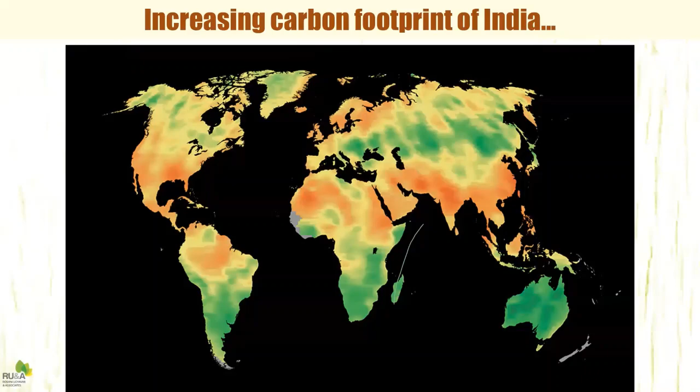Now, I want to show you this particularly from the context of India, which is a developing nation. And although our per capita carbon dioxide is low, our overall carbon dioxide emissions are increasing and our carbon footprint is increasing on the planet. We are third today in the world and increasing by leaps and bounds. So in terms of climate change, which is one of the major changes being caused by us, we need to do a lot in terms of mitigation.

We have the time, we have the resources because we are not yet there, and we can do the changes, we can think of the correct technologies, we can think of the way by which we can reverse many things which many of the developed nations are not in a position to do.

The World Meteorological Organization's latest report on the state of climate change says that the concentrations of carbon dioxide in the atmosphere hit a record level of 407.8 parts per million in 2018 as compared to pre-industrial levels of 280 parts per million. This is a huge jump, and this has led to an increase in temperature all over the world.

Not to mention that more than 26% of the ocean has become acidic, and as a result there are so many changes that are happening to the environment. There is unpredictable weather, there is increase in precipitation, and so on and so forth all over the world.

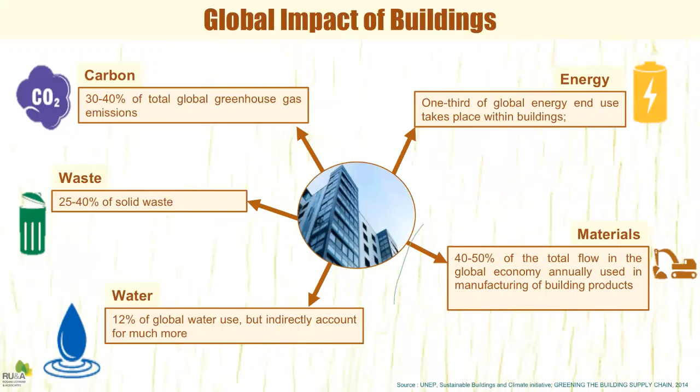12% of water, and that does not include the water that goes into materials. Solid waste, 25 to 40%. So this is the contribution or the impact of buildings. The built environment is next only to agriculture in its impact on the Earth's ecosystems.

If you look at these two graphs, and I just want to show it very quickly, just to give you a background, India's primary energy consumption, you can see the first graph, 56% is still from coal, no matter how much we're talking about renewable energy, etc. So that means that we are still a huge contributor to carbon dioxide by using coal as a basis for our primary energy consumption.

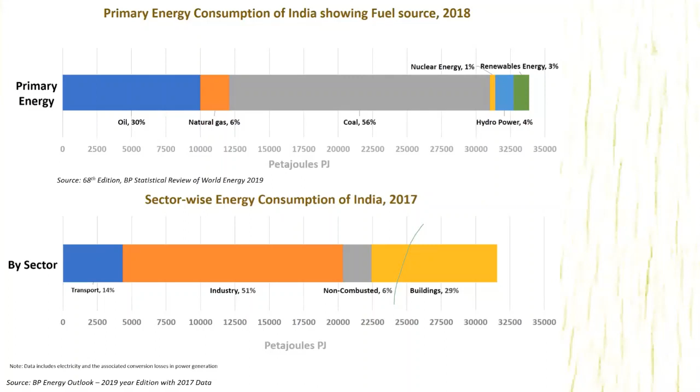And if you look at the second graph, the buildings are one of the major consumers of energy, 30%. So we can do a lot by reducing our energy consumption, plugging our fossil fuel emissions, by making our buildings more energy efficient, by replacing the sources of energy to renewable energy, and so on.

Hello. Yes. Ma'am, you are not there on the Telegram group. Hello, Roshni madam. Hello. Hello. Roshni madam, you are not audible. Roshni madam. Rushali madam, can we call her? Yes, I'll call her. Yeah, I'm here. Okay, okay, ma'am. Sorry for the disruption. I think I will again need to share my screen. Yes, yes. So can you see the screen again?

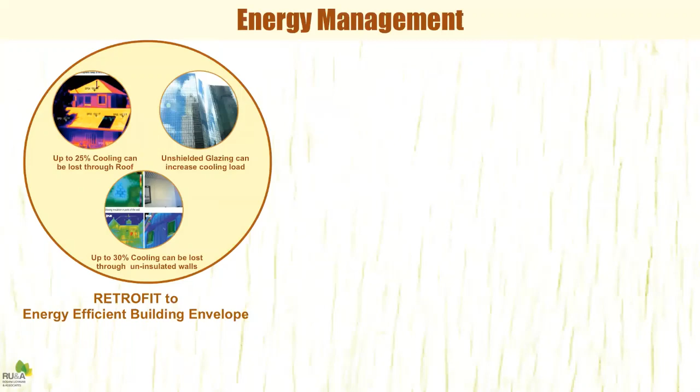And then of course the walls, we don't have proper quality walls, then uninsulated walls. These all lead to making the buildings inefficient. So building envelope includes the roof, the walls, the windows. If these are properly designed, or these can be retrofitted if required, then they can contribute up to 15 to 20% of energy reduction of the building. So that is the first part.

The second part is lighting, HVAC, that is air conditioning, and other equipment. There are many of these lightings. For example, now everybody is shifting to more efficient lighting. But however, in a lot of places we still find old 40-watt tube lights, which are inefficient, the T12s and so on. So these can be replaced with more efficient lighting. You can have sensor based, you can have controls, you can make the most of daylighting, so that you do not require a lot of artificial lights.

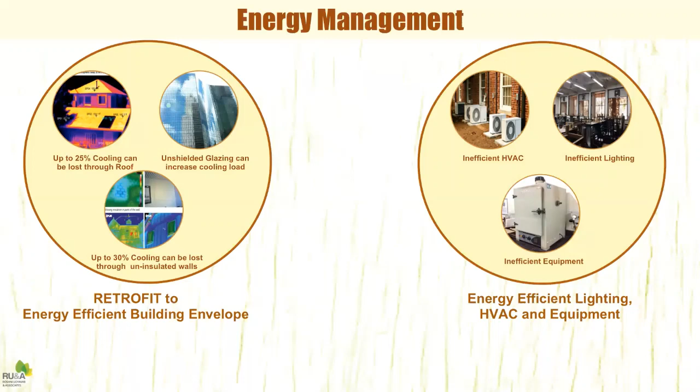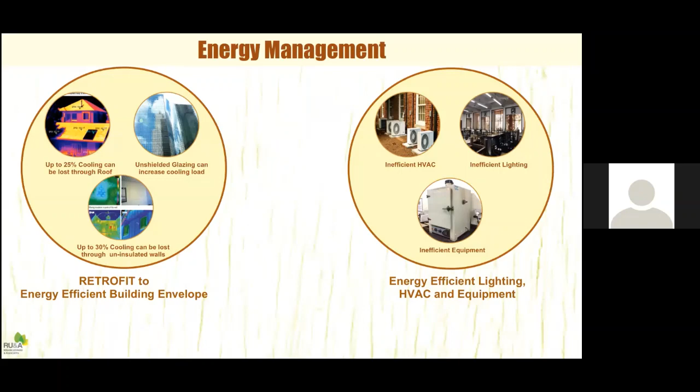You can replace over time the HVAC. Your air conditioning system may not be working as it was supposed to, and therefore you need to check that and improve it, monitor it over a period of time. And also the other equipment that we use in different types of schools and colleges are also causes. So all of this is the second part, where we have the scope of reducing your energy bills, increasing your energy efficiency.

So once we do the envelope and the equipment, the third thing is to see if we can introduce renewable energy. That is solar energy mainly, because that is the easier thing to be done. Other forms of renewable energy will require a little bit more thought, but in some places solar wind hybrid has also worked very well, and that can also be tried, especially in case of large campuses, to have a battery backup, and then you can have this kind of system. So this is in a nutshell what energy management covers.

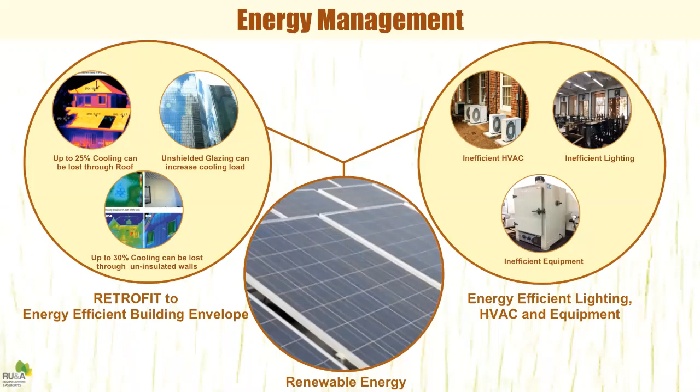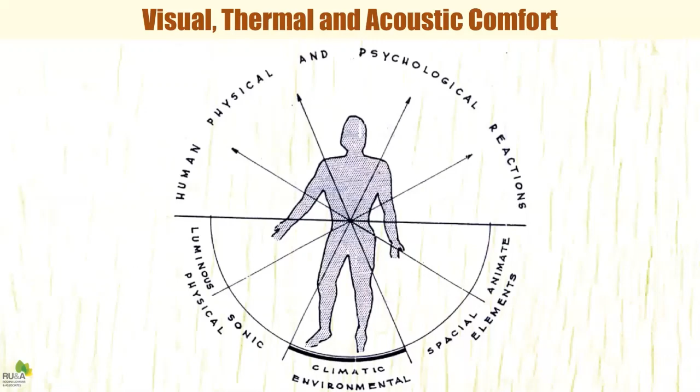But what is important for us as designers is also that, okay, you make the building energy efficient, but is it comfortable for the inhabitants? Do they sweat out when they sit in the classroom and they cannot concentrate on the lecture? Or do they need more light? Do they need to put on the light all the time because there's not enough daylighting? Or is there too much noise coming from outside? So visual, thermal, and acoustic comfort is as important as energy efficiency.

So I want to give you one example of what we had done for a college in Mumbai. We had retrofitted it for achieving both thermal comfort and energy efficiency. And I will just show you what was the case in this. The 6th floor required a retrofit, and we introduced the following items. For example, dry wall. Dry wall is a hollow wall which can be used instead of a solid brick wall. We introduced high albedo paint, which reduces 50% right away of your solar radiation coming onto your roof. We introduced a radiant barrier, which is, no matter how much heat is falling on your roof, it does not radiate it inside the building.

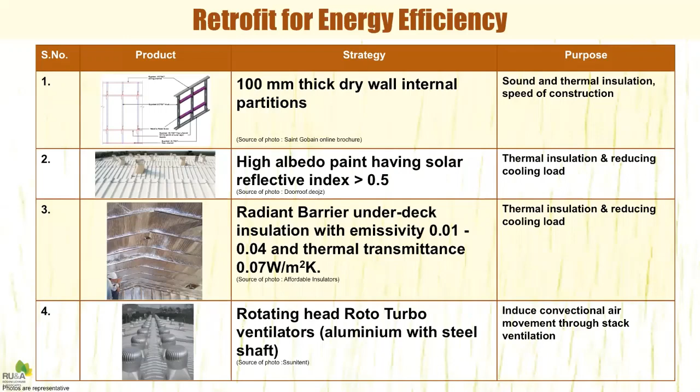We introduced rotating turbo ventilators, which helped the stack ventilation. Unfortunately, the whole building had on the top a false roof, which prevented any movement of air. So we facilitated that air. We opened up the spaces. Then we introduced various kinds of lighting. So, corrugated translucent sheets and polycarbonate sheets so that the light could come in, so that there is no need of artificial light. In terms of spatially rearranging, we removed the false ceiling, we increased the windows so that there is cross ventilation, and we provided stack ventilation by removing the false ceiling.

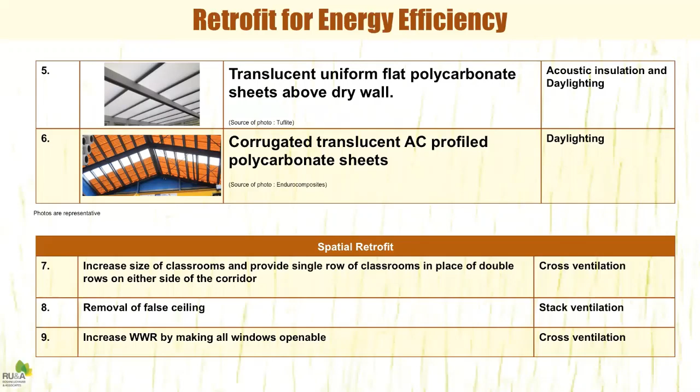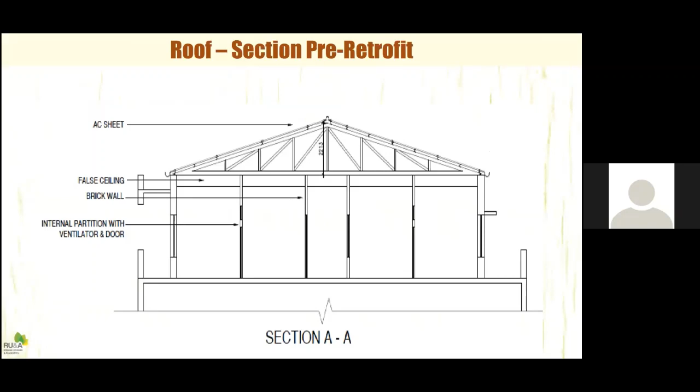So this is how the building looked. Initially, it had a false ceiling, brick wall, and so on, and there were internal partitions, and we changed it to this. So, there is stack ventilation, cross ventilation, there is a reduction of heat from the roof, which was the main cause of discomfort.

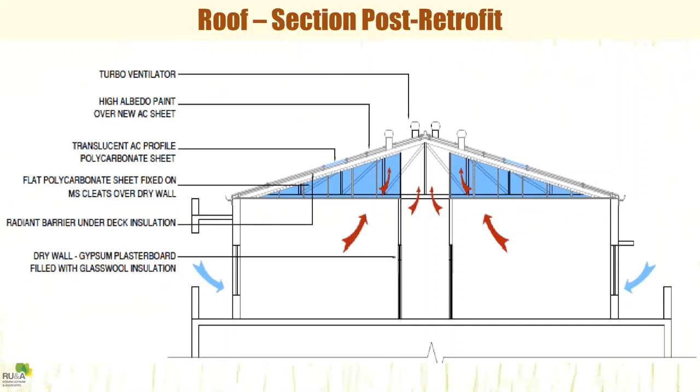And this is a cross section of the roof, which shows you a very important factor I want to point out here, the figure 4.64 watts per meter square Kelvin. That is the U value, or the thermal transmittance of the roof earlier. And what we were able to reduce it to was 0.03. So that meant a significant drop in the heat coming inside the building.

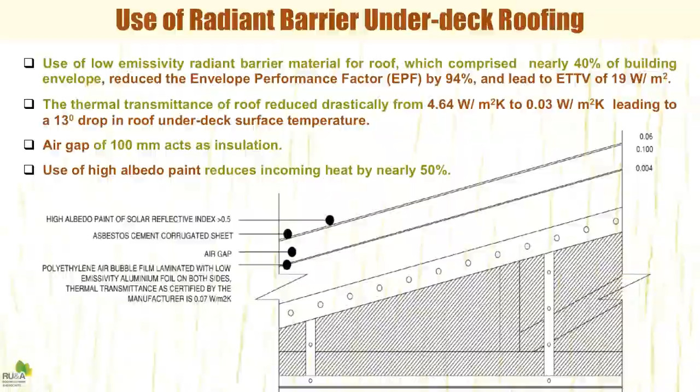So these are some pictures before and after, how we managed to open up the spaces, how we managed to create more light and ventilation. Not rocket science, but simple things that could improve the acoustic and thermal comfort and the visual comfort inside the buildings.

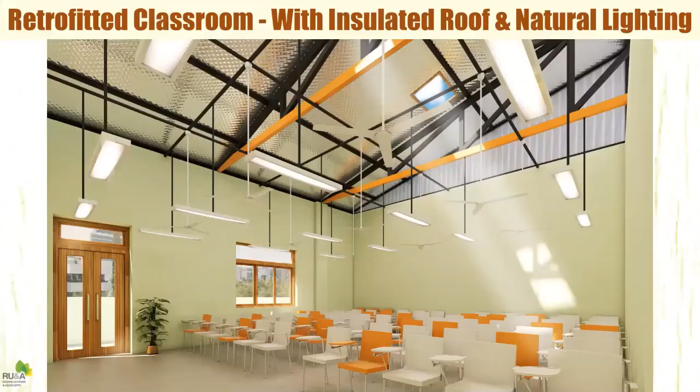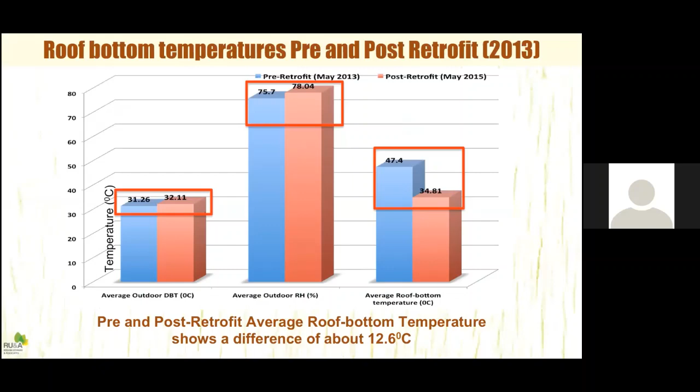So this is a view of the classroom. What we were able to achieve, we measured it. We always monitor our projects. So we measured pre and post retrofit within the same kind of outdoor temperature and humidity. What was the difference? And we found that there was almost 12 to 13 degree difference in the roof bottom temperature, which is significant because that will overall reduce the mean radiant temperature and provide better thermal comfort to the occupants, apart from the other things that we achieved, that is the natural lighting, and so on, which has many benefits.

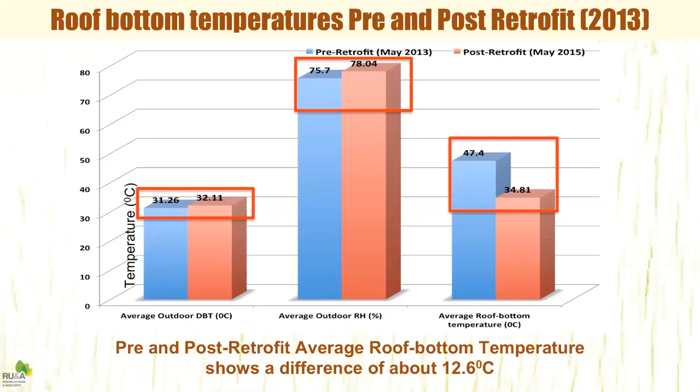The second example of retrofit that I want to show you is that of the Empire State Building, which you must have all heard of. It was a building built during the 1930s depression, and it was a very, very energy guzzling building, as you can imagine, a tall building, and had many, many issues. It was a very iconic building, but it used a lot of energy. So an energy retrofit was achieved here by Rocky Mountain Institute.

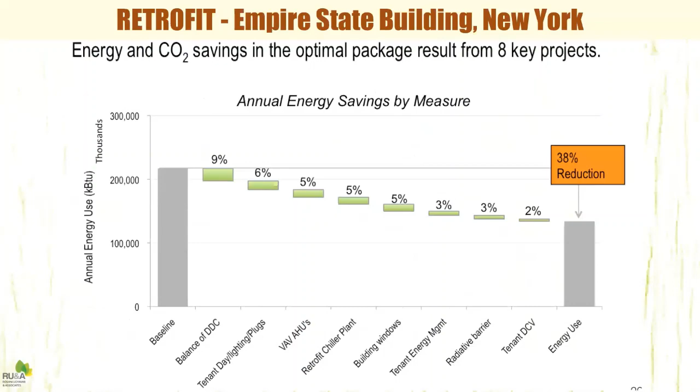And you can see the various things at the bottom that were done, but the important thing, if you can see the building windows, there were 6,500 windows of the building that were replaced. And that led to a decrease. So you can see there is a stepwise sort of reduction. As you make the envelope more and more efficient, the less air conditioning you require, and overall about 38% reduction was achieved in a building of that kind, just by doing a good retrofit. So you can see the building here, the 6,500 windows were changed from single glazed to triple glazed, and that achieved a lot in terms of making the building efficient.

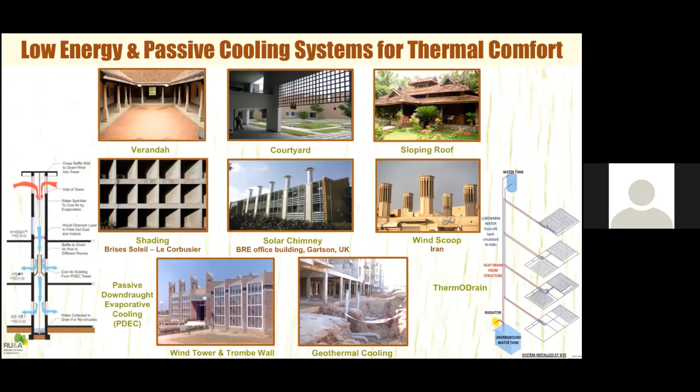I talked about visual and thermal comfort. So I quickly want to show you that thermal comfort has already been there in our traditional architecture. If you see verandas, courtyards, sloping roofs, these are all traditional elements, and these have scientific principles because they have stack ventilation, night sky cooling. All these are principles that we have already used. And if we simply adopt them in our modern buildings, we can achieve the same kind of thermal comfort.

The second row of pictures here shows the shading devices, which were introduced by an architect called Le Corbusier. He used these large shading devices called brise-soleil, or the concept of solar chimney, or the wind scoop that is used in traditional buildings in Iran. And on the bottom, what you can see are the modern transformations of these principles used in modern buildings, the wind tower and the Trombe wall, the geothermal cooling, which helps the building to cool naturally. So all of these technologies try to use zero or next to zero mechanical energy. That means less and less energy. The building by itself is designed in a way that it doesn't consume energy.

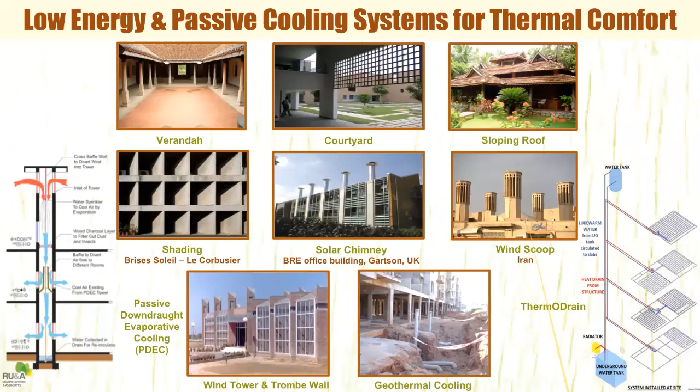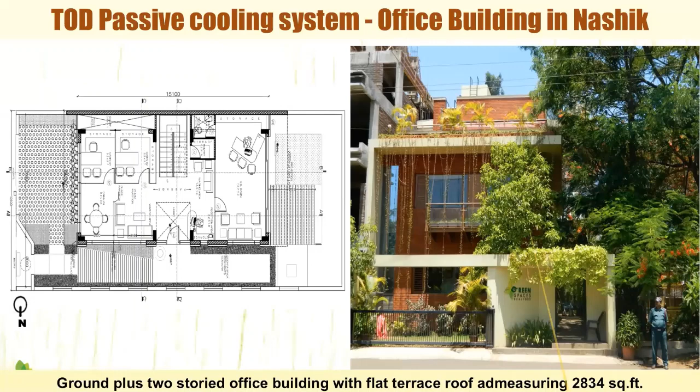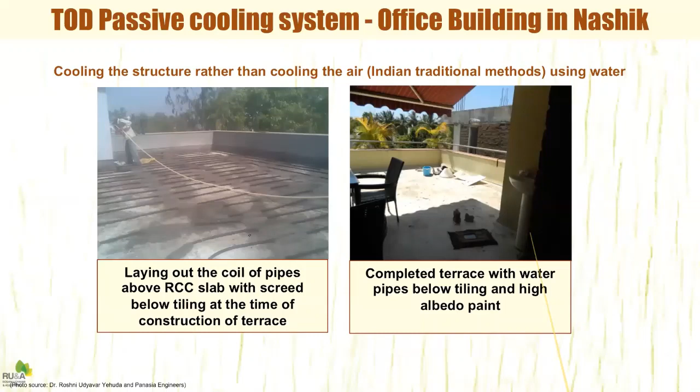And on the right hand side, you will see something called ThermODrain, which has been experimented. This is a commercial building done by architect Sanjay Patil, and Panasia Engineers, Mr. Surendra Shah, has worked on the cooling system. So it is a natural cooling system. There are pipes inserted inside the building in such a way that almost the entire cooling requirement of this building is met through passive means of water circulation in the slab, and there is no air conditioning system in this building, and yet the building remains cool by just this system. These are pictures of when the pipes were being laid out, and post that when we took the measurements, and you can see the results.

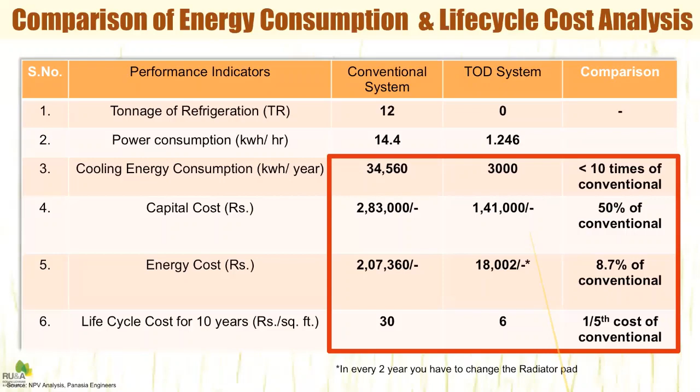So why wouldn't all buildings be designed in this manner, so that you do not require, or you require very minimal air conditioning as a backup only? So we have covered thermal comfort. I've shown you an example, and now I want to focus a little bit on daylighting and visual comfort, because this is also a very important component, not only daylighting, but also artificial lighting.

How we design this, or how sometimes we have windows and we have seen that they are blocked with some things, not consciously done, but in many of the buildings, we find that the very source of light and ventilation have been closed permanently or are not allowed. So our job in this retrofit is just to look at these things and increase these, because natural light not only has a positive effect in terms of the use of less artificial light, but also it has a positive effect on your psychology, and you're able to work more productively in a place which gets good natural light.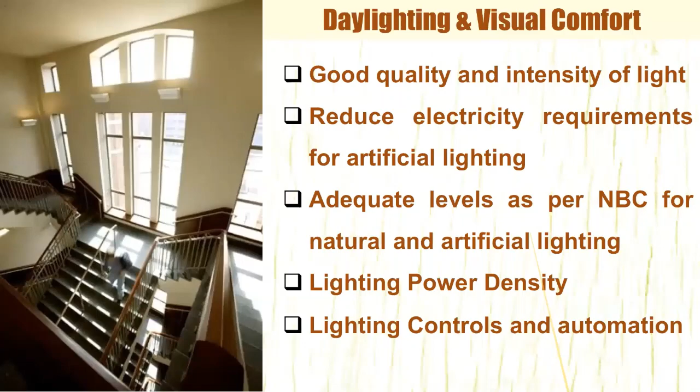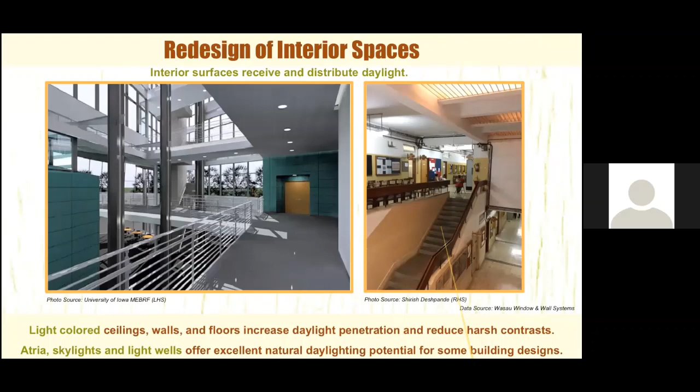So lighting power density, for example, how much artificial light you're using per square meter of space, all these are important. And if you can introduce lighting controls such as photo sensors and so on, those are also part of things that can be done. Here I just want to show you light wells, for example, light which not only comes from the walls but also from skylights, how you can introduce them. And they have been introduced in some of the buildings, and they have the capability of making the building live, providing good daylight penetration inside the building.

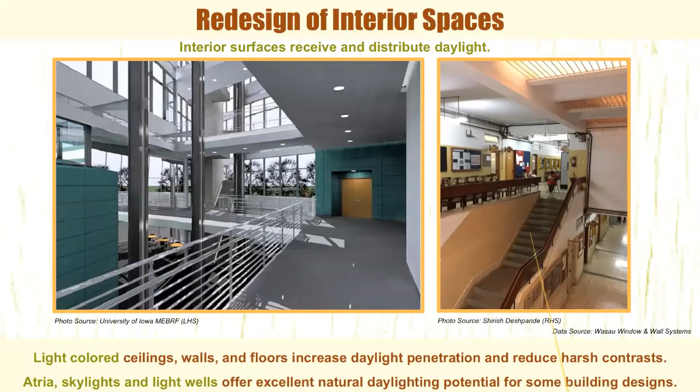In some buildings, for example, I recall that the Cement House in Churchgate, while making it into a green building, they actually opened up the core of the building and provided a light well and made the whole office into an open space. So much of light and no artificial light began to be used. So that was about what you can do about visual and thermal comfort. And the third aspect of energy management is use of efficient lighting and equipment.

So you can replace, maybe in phases, all your lighting which is inefficient, maybe the old types of tube lights, maybe the old types of ballasts which are inefficient. You may also know that ballasts of the tube lights use a certain percentage of the energy. So if your tube light is say 40 watts, another 15 watts is probably consumed by the ballast, which you don't know. You're thinking you're using 40 watts, but no. So all these changes can be done.

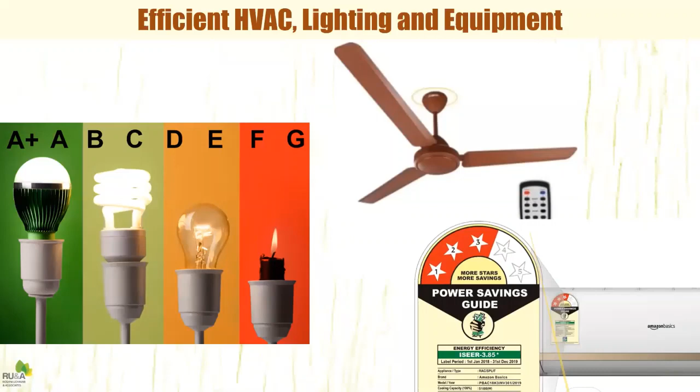You can shift to a more efficient lighting system, which has a good lumen output on the surface so that students can read better, or classrooms can be better lit, libraries can be better lit, and so on. Also, you can change your fans from the traditional 60 watts, 65 watts, or 70 watts to something which is more efficient, like 35 watts. A brushless DC fan can be used, or you can change all your equipment. Today, the Bureau of Energy Efficiency provides star-rated equipment. If you go for 3 or 5-star rated equipment, they may cost a little bit more, but they are going to save you in the long run a lot of energy.

So in terms of lighting, I just wanted to show you what are the considerations. One is what is the life of the light? What is the toxic effect? So when we look at some of these tubes, like fluorescent tubes and compact tubes, there is one aspect that is mercury. When it is disposed of, mercury is let into the dumping grounds or the landfills. Whereas if you use light emitting diodes and so on, you have no such effect.

The rated life is also important. If it is 50,000 hours, like in the case of LED, then it is extremely good for you. And also the efficacy, that is output to the input, how much it is giving you, is also very important. So you can see that light emitting diodes give you between the range of 60 to 76 lumens per watt, which is very important.

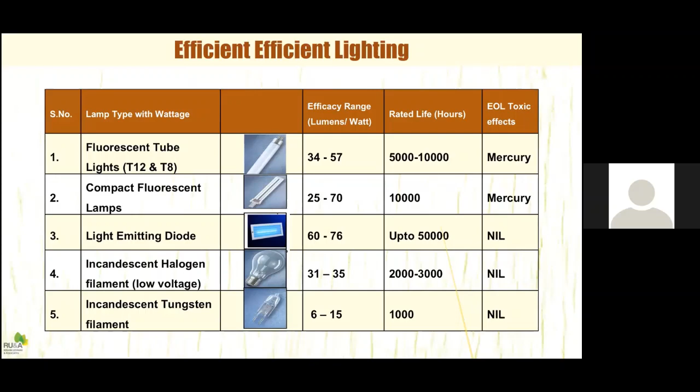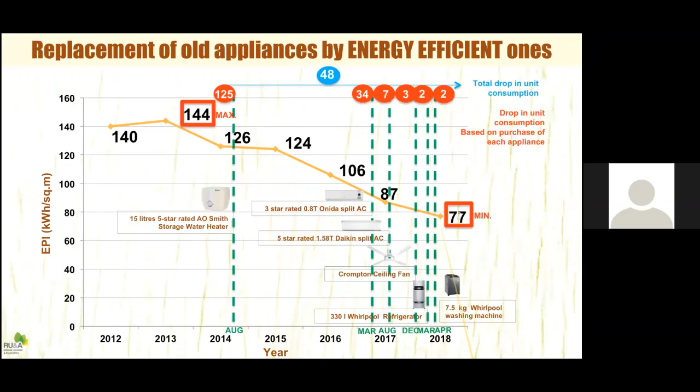The last thing in this energy management that I want to talk about is the concept of nearly zero energy buildings. We cannot be net zero. There are many reasons for that, because net zero is a good concept, but let's be fair, we can't be net zero, but nearly zero is possible. If you reach this benchmark of 15 kilowatt hour per meter square as defined by the Bureau of Energy Efficiency, then you can achieve this nearly zero energy building. That is, after making your building efficient, if you are able to introduce renewable energy in the balance, then you are able to reach that.

And I think this is a target many campuses can look at. If they have the funds or they are able to raise the funds, they should go for it, and there are many schemes right now which allow colleges, without doing any investment, to be able to introduce renewable energy. We can take that up later.

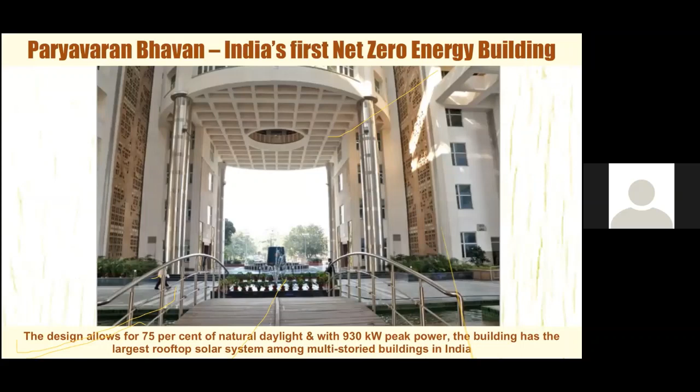An example of a net zero energy building already exists, and I'm sure many of you know about it, but for those who don't know, our Paryavaran Bhavan located in Delhi is India's first net zero energy building. By designing it in a way that you have maximum amount, 75% of natural daylight in most of the spaces, and by introducing a rooftop solar which extends beyond the building, it has actually become net positive. That is, it is giving energy back to the grid. So this is the kind of vision that we need to have for energy management of buildings.

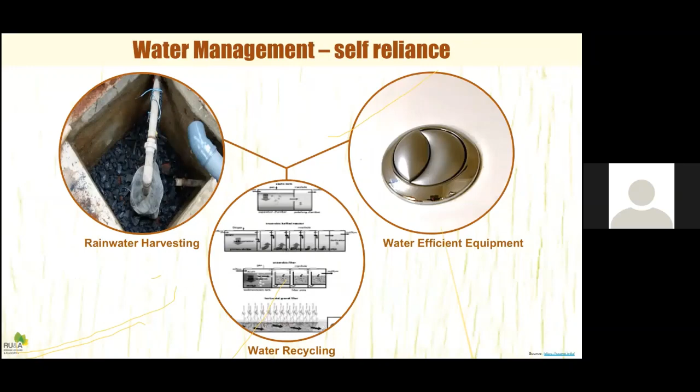The next thing that we can talk about is water management, and here what is important is self-reliance. So there are three aspects of how we can be self-reliant in water. May not be possible in urban areas, but maybe we can give it a try. One is by doing rainwater harvesting, which is harvesting all the water that is falling within your compound, within your campus, and making use of it either for recharging or for non-domestic purposes and so on.

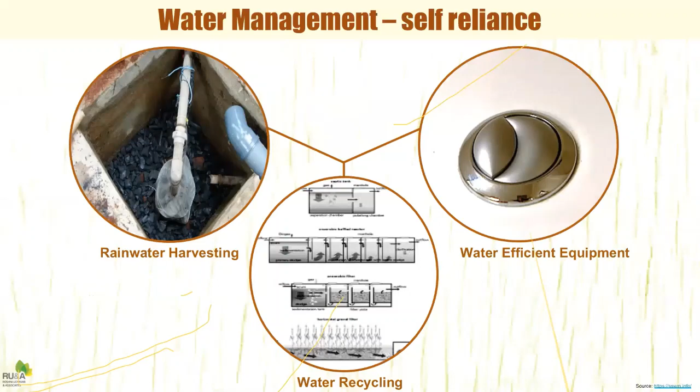And you can have recycling of water, either gray water or black water recycling within your campus if you have enough space, or just do gray water recycling if there is not enough space, and then use water efficient equipment. Of course, there has to be a lot of awareness among the users to see that the use of the water efficient equipment is done properly.

So rainwater harvesting can be done in two ways. One is you can store the water, for which you require lots of storage because you get only 4 months. Luckily, in almost the whole of India we get 4 months of monsoon, 4 months of rain, which needs to be stored. The other option is to recharge the ground, and that is a better way mainly in urban areas because there is not enough space. Storage costs a lot. So we can do groundwater recharge. We have very little space left which is unpaved, so we are doing a good thing by putting it back. Of course, it requires a good amount of study; a geological investigation needs to be done.

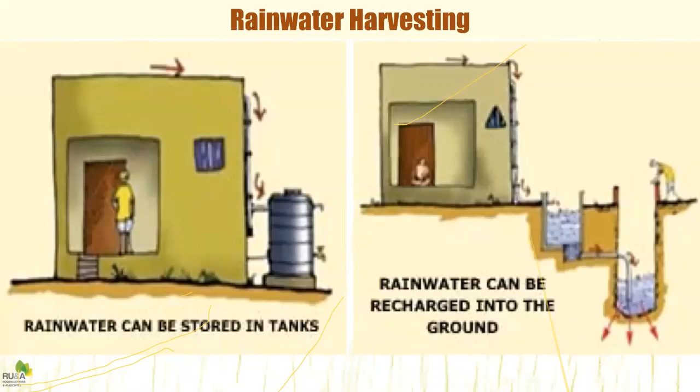So there are different parts of rainwater harvesting. The catchment, that is whatever surface rain falls on, whether it is the roof, the paved surface, or the garden, these are all catchments. And from here, the rainwater can be collected into a storm water drain. So there are channels. From your roof, you can collect it through the downtake pipes, and then it can go somewhere. The third element that is required is a filter.

So it can be either plugged into your downtake pipe or it can be introduced as a separate element. It filters all the unnecessary elements. And then the last thing is groundwater recharge. Depending upon the kind of situation, there can be different types of groundwater recharge systems that we can introduce.

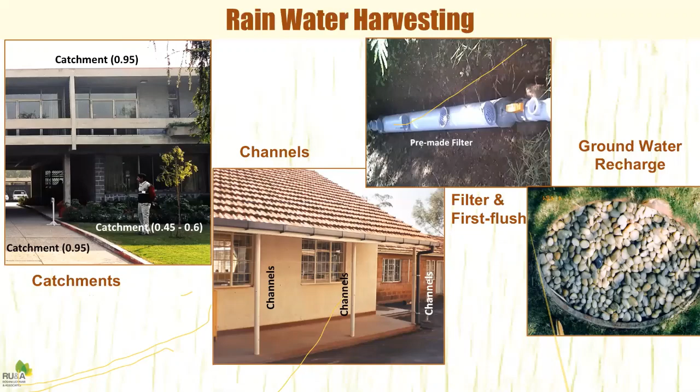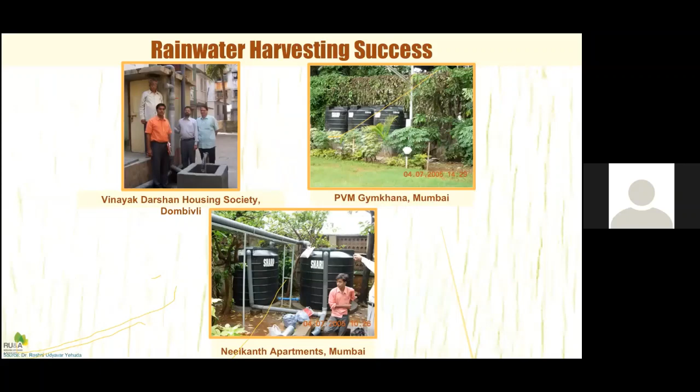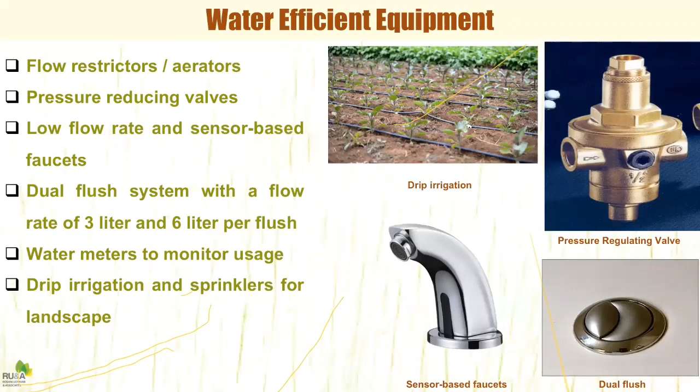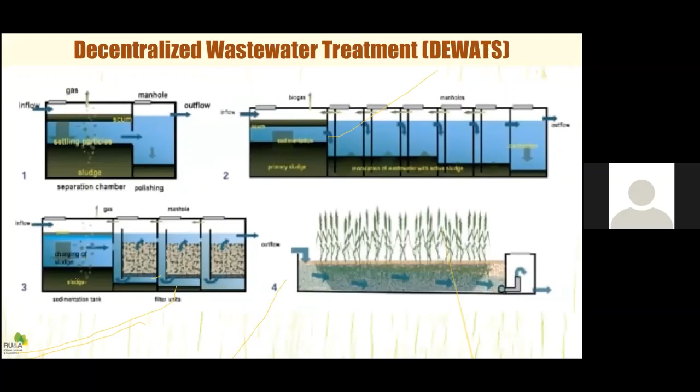And thirdly is the wastewater treatment. And I personally support the decentralized wastewater treatment systems, which are simple anaerobic and aerobic systems requiring a septic tank, a baffled reactor, a reed bed system, which uses natural aquatic plants. Through their roots, the waste gets oxygenated. The thing is, this kind of system is basically a natural system. It doesn't require mechanical energy to treat your waste. So where possible, where there is a space, this kind of system can be installed.

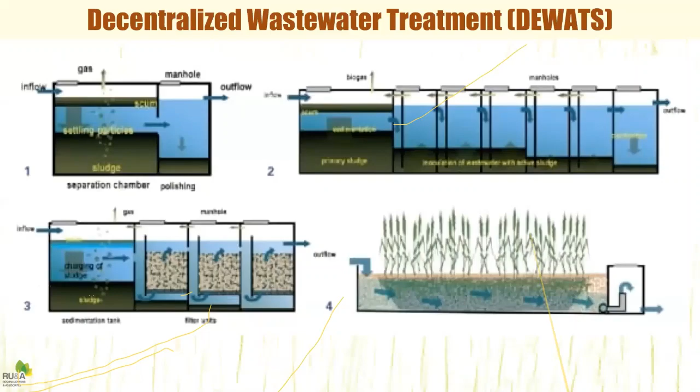It requires monitoring, in the sense of checking the output quality, but it has a good efficiency as well and can be implemented. These are all examples courtesy of Nature Solutions, which are all reed bed treatment systems for both grey water recycling and black water recycling, implemented in various parts of the country. So it's absolutely possible. You may think this is a garden, but actually it's a water recycling system. So this is also another aspect.

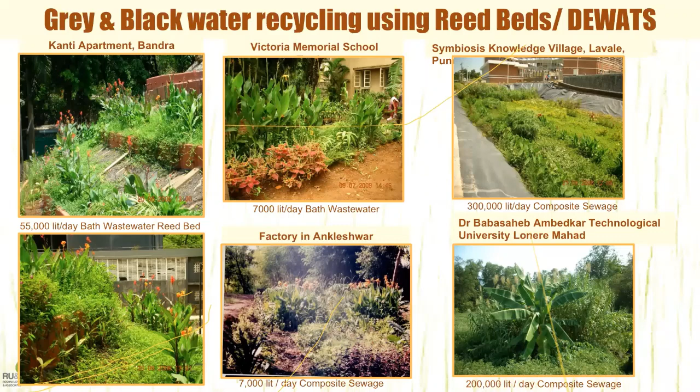Now coming to the solid waste, the whole vision can be that of making a zero waste campus. And I think this is absolutely doable. This requires, number one, waste segregation, which many of you probably are already doing. The second is to look at what to do with the organic waste, how best to treat it. And the third is to look at what to do with the recyclables.

Now here again, I will talk about audit, but the characterization of the waste is important, knowing specifically what kind of waste. For example, if you have a fashion or a technology institute, there may be a lot of cloth waste, or there is food waste, or predominantly paper waste if it's an architecture or design or engineering college. So you have to be specifically seeing what kind of waste, and of course the student community needs to be involved in this as well.

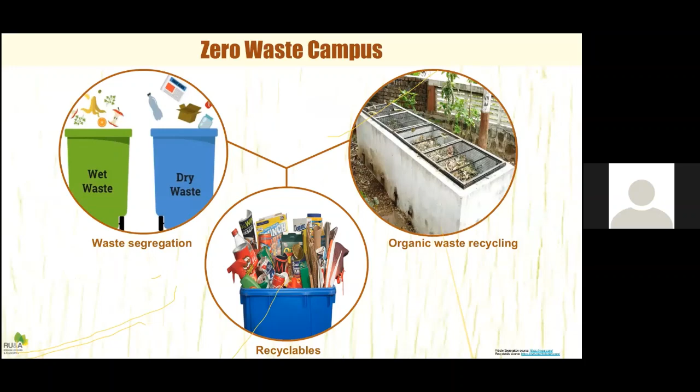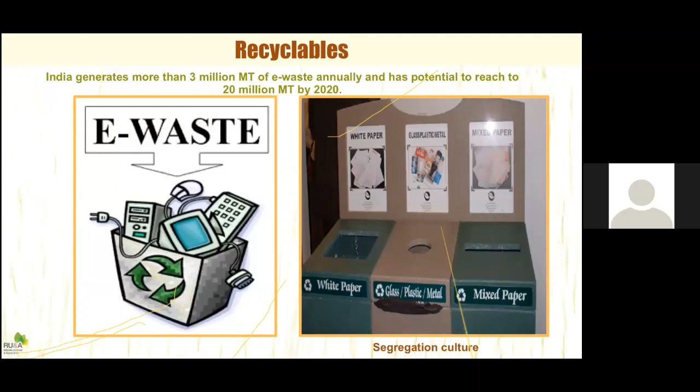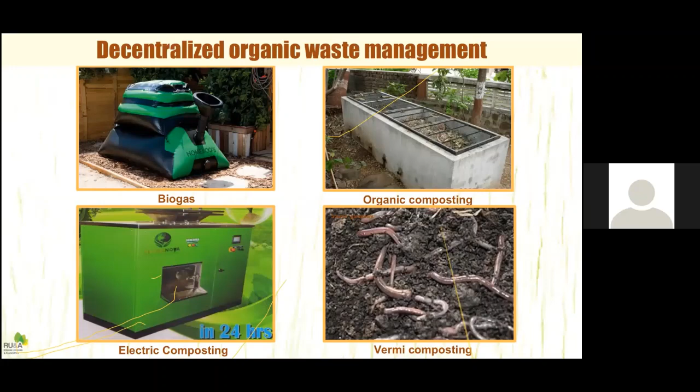So e-waste is a huge thing, and it's not at all difficult to install e-waste systems. Connect yourself to a company which recycles e-waste, and put segregators everywhere, which not only is important, but also communicates something to your student and academic community. And based on what kind of solutions you require and what kind of space you have, you can go for a decentralized organic waste management system. You can go even for biogas formation. You can go for vermicomposting, organic composting, and in very rare cases also electrical composting, if there is lack of space or something like that.

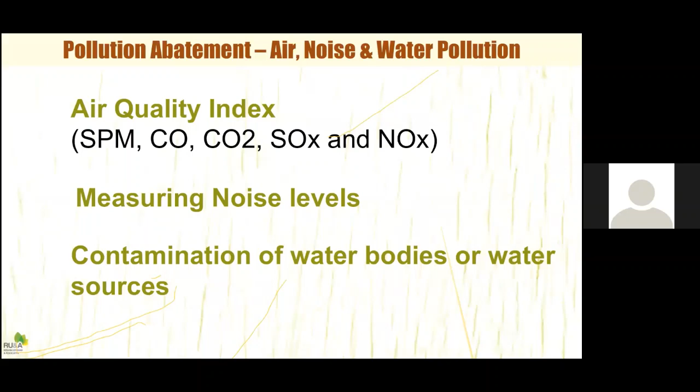The next aspect is about pollution abatement. So you can check the air quality index within your campus, measure it. The noise factor: some campuses are close to railway lines or close to roads. So how do we make buffers in the campus? How do we improve the envelope of the building in order to reduce the noise? Or if there is a contaminated water body within the campus, how can it be treated and made better?

You can have a whole aspect of carbon footprint reduction. There are two things in carbon footprint. One is your energy consumption. So that is your major source of carbon emission for the campus. So whatever energy consumption in kilowatt hour units comes, based on the source we can convert it into a carbon footprint and find out what is your carbon footprint, and then assess it and see how we can reduce it by, of course, mitigating, making energy efficient and using renewable energy and so on.

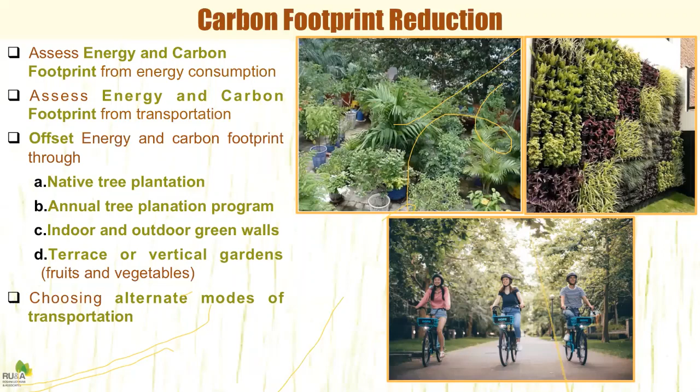Similarly, transportation. If you have a large campus, then do you use buses for transportation? Do you use a private mode of transportation? Do you have a railway station nearby, and so on? So these are the factors. So how do you mitigate or offset this carbon footprint? You can do plantation of native trees. You can have an annual tree plantation program. You can introduce the concept called green walls, which can be inside the building. And for this, even the wastewater can be used. And of course, you can choose alternative modes of transportation.

Another concept, and I think probably the last one, is vegetation and biodiversity, how you can enhance this within your campus. You can design ecological zones. There are so many campuses I have visited, like Hong Kong University. I saw this beautiful ecological and biodiverse area with all the nameplates. So community

Hello, hello, Roshni madam. Hello. Yes, madam. Your voice was not audible. Okay. I hope it was just this. Yes, yes. Just a minute ago. Yes. Hello. Hello. Yeah, can I continue? Yes, yes, ma'am. Please continue.

Okay. So in campuses, how you can use the biodiversity? First of all, mapping biodiversity, the different kinds of birds, and so on. Even some kinds of things like a greenhouse, food, for example, these can all be in collaboration with the students, and a long-term plan for ecological sustainability at campus. So these are the areas which exist. I am just giving a brief idea of what can be done to improve the biodiversity in your campus.

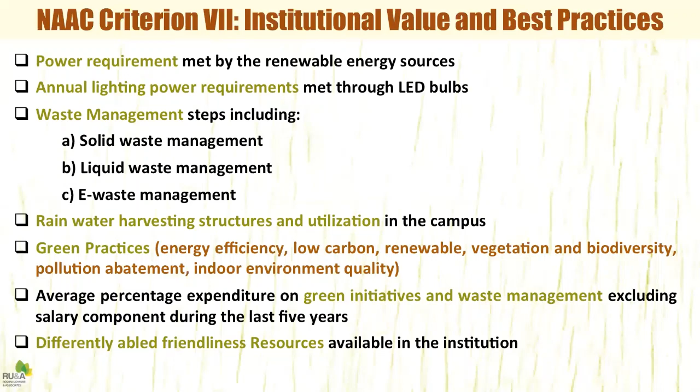So this is about designing your campus for all. It's called universal design. So whether you are providing proper kind of access, size of the washrooms, etc., the accessibility, the doors for all kinds of people, including wheelchair access should be provided, and so on.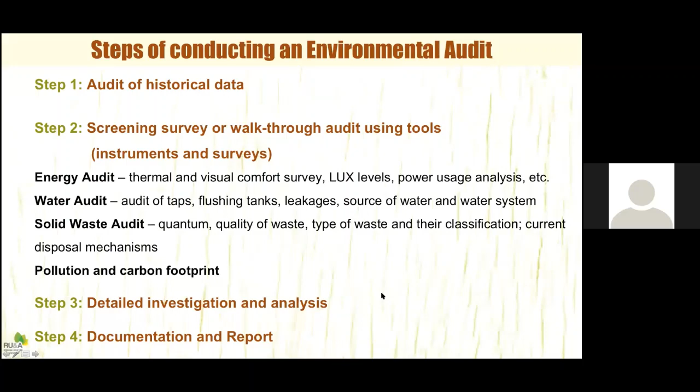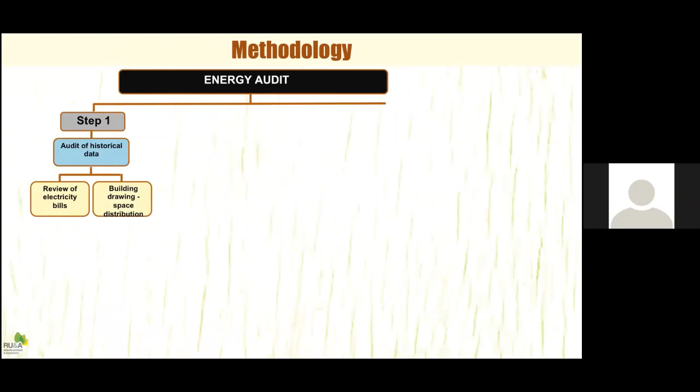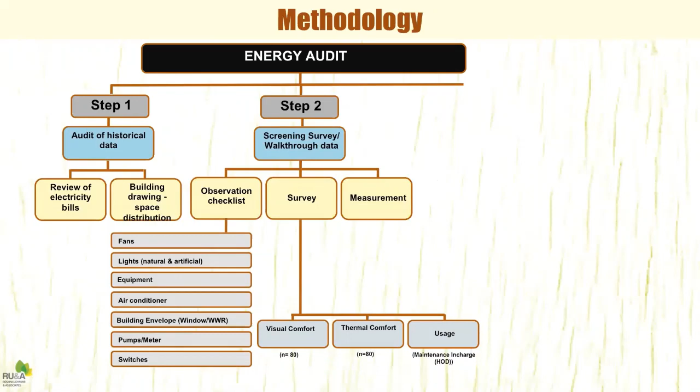I just want to show you energy audit, what kind of methodology we use. So step one, audit of historical data, review of bills, building drawings. Step two is screening, survey, walkthrough data, which includes all the survey and measurements. And then you can do visual, thermal comfort and usage. You can do measurements. And this is step three.

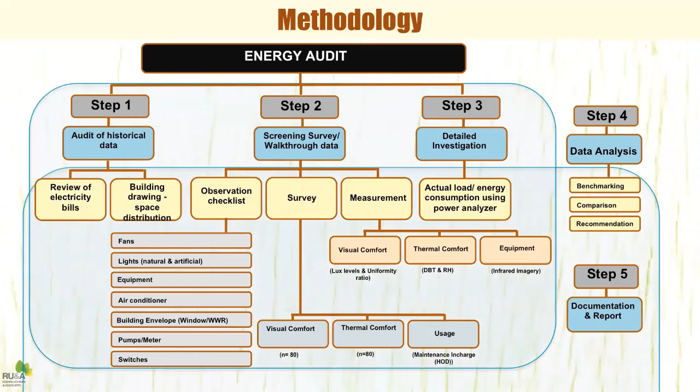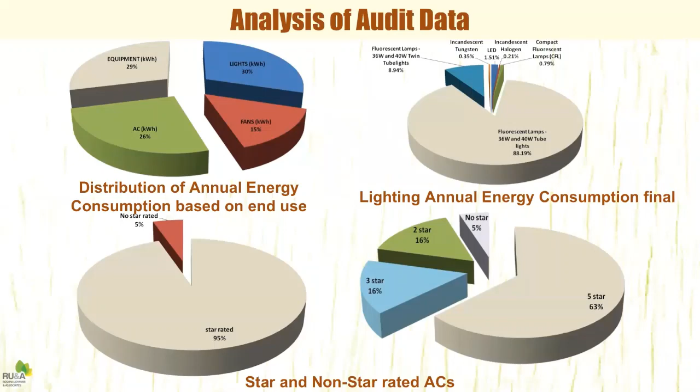The last part of the green campus is feasibility, compliance, and commissioning. So here you can see that the analysis is first done. So this is the feasibility. You have a lot of data, but now to analyze this data. So for example, how much of your ACs are rated or non-rated, what kind of lighting annual energy consumption, how much of it is with fluorescent lamps, how much is LED, or how much of your energy consumption is by ACs and fans and lights. So this kind of separation of data is done.

Similarly, billing analysis includes energy consumption in kilowatt hours, how it has been over the years, by what addition or alteration, how it has moderated the EPI. Now this is benchmarking. So EPI, for example, is a benchmark given by the Bureau of Energy Efficiency, kilowatt hour per square meter per year. So this you can compare with your institutional EPI.

Similarly, there is something called specific energy consumption, how much energy per person or how much cost you consume per person for electricity. These are all different benchmarking things. Similarly, for lighting, you can see what is the lighting power density given by the ECBC standards, and where you stand in that. That kind of analysis is done.

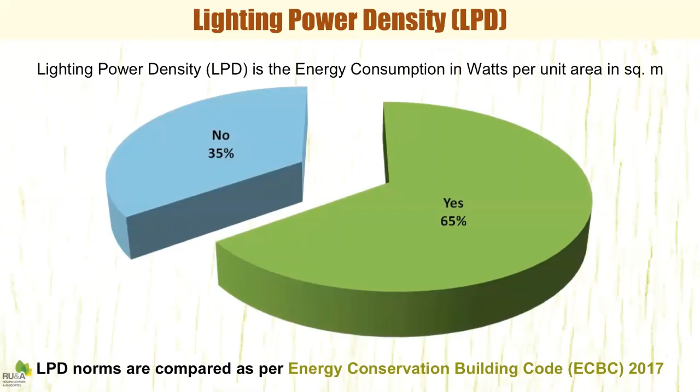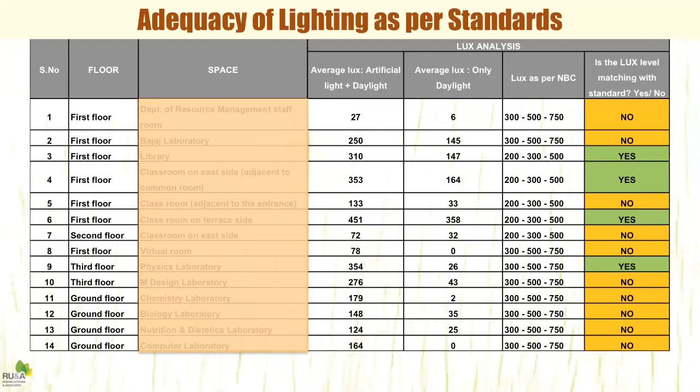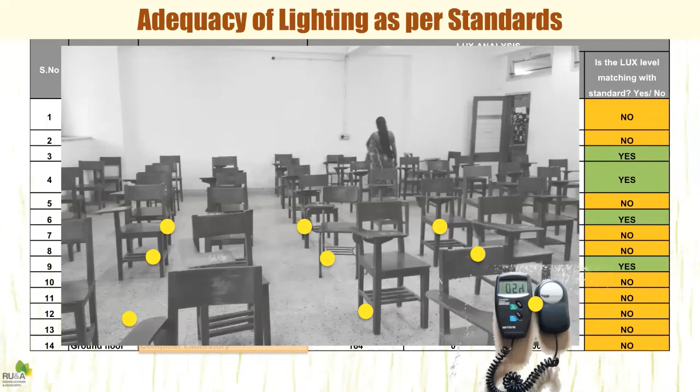Similarly, for visual comfort, we do this testing using a lux meter. So in the last column, you can see how much of your spaces actually match with the National Building Code. Do they match or not? And if not, then what needs to be done? This is done using a lux meter in any random space, different points are taken. Similarly, whether your lighting visual comfort is as per the standards given by the NBC or not.

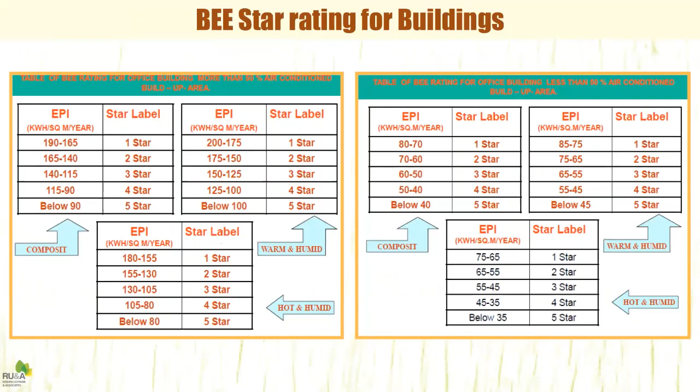So in general, all of these analyses after the audit is done are based on standards and benchmarks, for which we follow the National Building Code, in which Chapter 11 of the new National Building Code 2016 talks specifically about sustainability. Besides that, the Energy Conservation Building Code is addressed. And lastly, we also look at the EPI range given under the Bureau of Energy Efficiency.

So in feasibility, compliance, and commissioning, we talk about replacement. So here, for example, if your existing system is twin fluorescent tube lights, the more efficient option is twin tube lights with LEDs of 18 watts, or T8s, which are more efficient. So on the left, you will see in the table the total cost and total annual savings in kilowatt hours, annual savings in rupees, and your simple payback period.

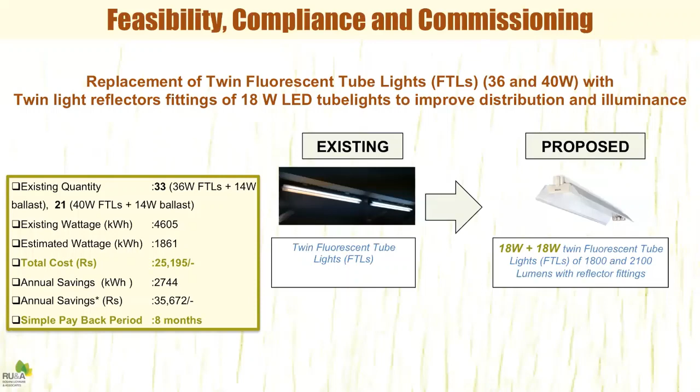So in this way, a feasibility will be given for each and every aspect. So energy audit, this is how it is done. For all the different aspects, it will be done.

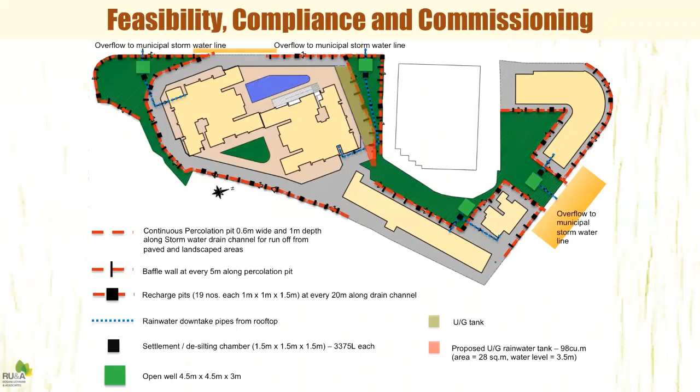Similarly, rainwater harvesting. A rainwater harvesting plan can be designed for the whole campus. What would be the cost? What are the different components? So maybe the college decides to do one of the many things in the first year, or decides only to do rainwater harvesting in the first year. So all of these can be done in phases.

So that is all about the process, that is green audit, feasibility, commissioning, what is done. Once you do a green campus, monitoring, training, and capacity building is also an important aspect. So maybe doing one or two training workshops every year for all the faculty and students can be an option. Involvement of the students through monitoring and reporting, maybe consumption, and there can be some innovative ways by which this can be done through communication boards, through apps, and so on.

There can be incentives to students, research can be done, and awards can be given to various classes for maintaining a good energy efficiency or something. And there have to be people identified in the campus as eco champions. Maybe they are coordinators, student leaders, staff leaders, academicians, and eco clubs, which many of you already have. All these things can be linked together.